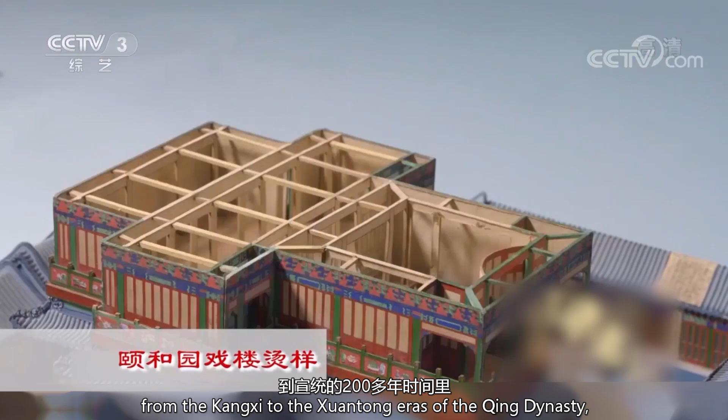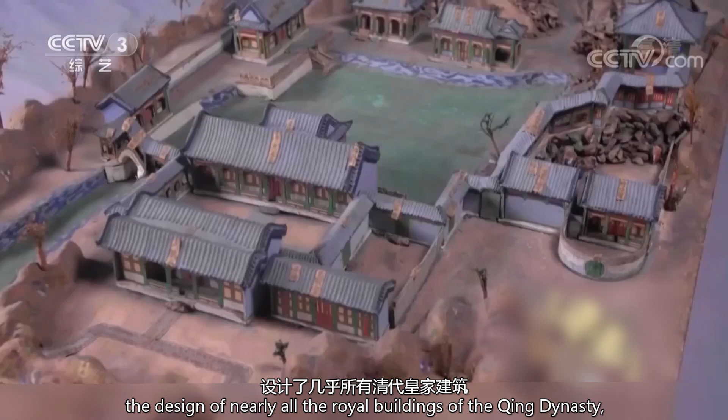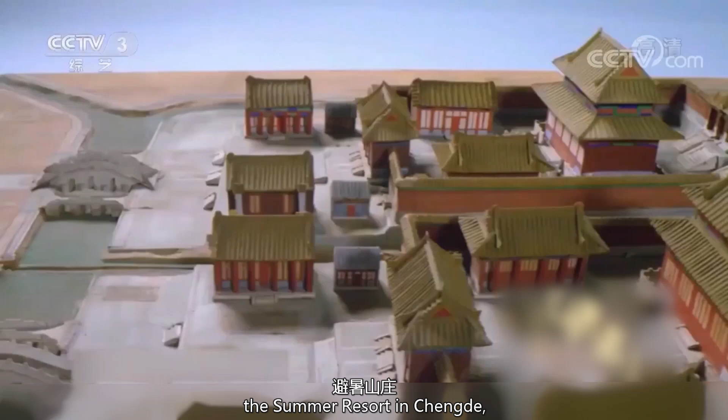Over the span of more than 200 years, from the Kangxi to the Xuantong eras of the Qing dynasty, a Lei family spanning 8 generations led or participated in the design of nearly all the royal buildings of the Qing dynasty, including the Yuanmingyuan, the Summer Palace, the Temple of Heaven, Zhongnanhai, Beihai, the Summer Resort in Chengde, the eastern and western tombs of the Qing dynasty, and so on. Currently, 1/5 of China's World Cultural Heritage Sites bear the mark of the Yangshi Lei family.

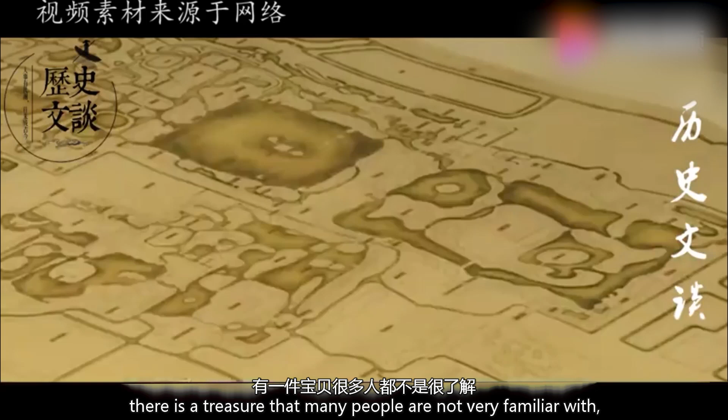Among the national treasures housed in the Forbidden City, there is a treasure that many people are not very familiar with, but its significance is immense. 1/5 of China's World Cultural Heritage Sites are associated with this treasure, which is known as the Yangshi Lei Architectural Drawings and Archives. The Yangshi Lei family is the most impressive general contractor in Chinese history. So, how impressive is the Yangshi Lei family exactly?

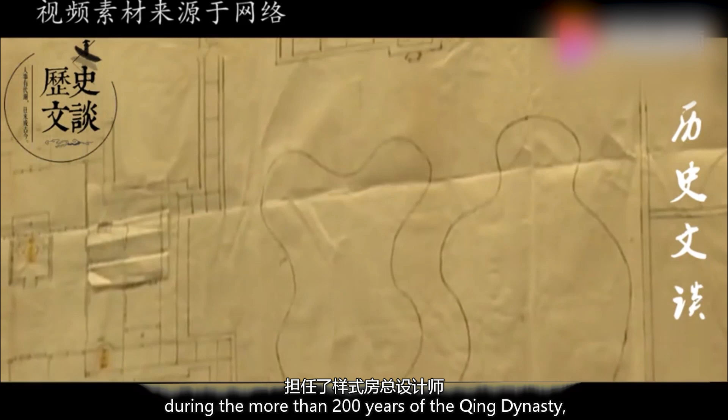The so-called Yangshi Lei refers to the 8 generations of the Lei family, who served as chief designers of the Yangshi Fang during the more than 200 years of the Qing dynasty, and designed and constructed a series of royal buildings such as temples, gardens, tombs, and palaces.

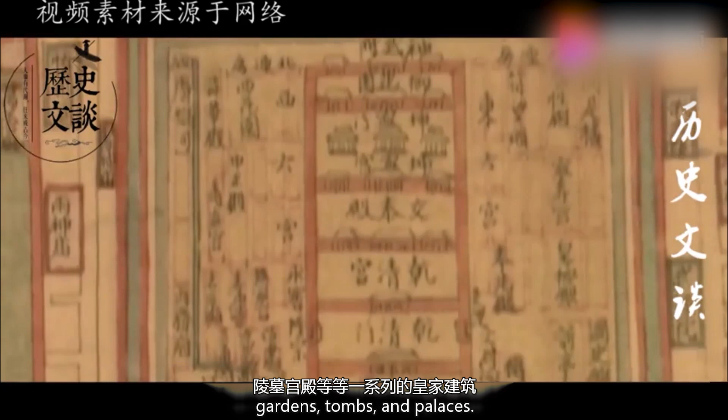In the late 17th century, a southern craftsman, Lei Fada, came to Beijing to work on the palace. Because of his skill, he was soon promoted to design. For 8 generations since him, until the end of the Qing dynasty, the main royal buildings, like the palace, the imperial mausoleum, the Old Summer Palace, the Summer Palace, were all in Lei's charge. This hereditary family of architects is called Yangshi Lei.

In traditional concepts, including the Forbidden City, the beauty of the shape and the ingenuity of the structure of ancient Chinese architecture are purely attributed to the rich experience of craftsmen, and it is not believed that craftsmen also have the ability to organize and express words and images. The large number of Tang samples left by the Yangshi Lei family provides rich drawings and Tang samples from design to construction, correcting the traditional view on the craftsmen of ancient architectures in the Forbidden City.

This explains that ancient Chinese architectural craftsmen not only possessed excellent construction skills, but also possessed the ability to design and express drawings and 3-dimensional models. Therefore, the significance of engaging in drawing drafting is great. We must strengthen our study, improve our self-cultivation, make better design drawings, and serve the people.

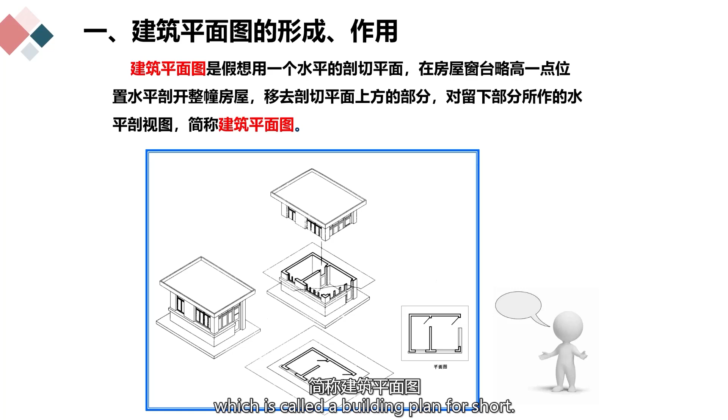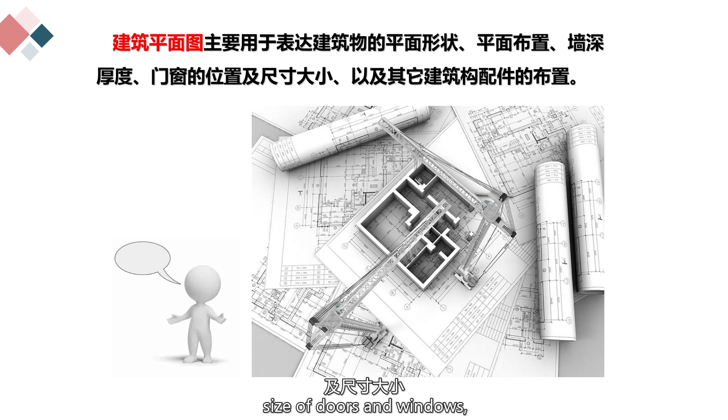First, a building plan is an imaginary horizontal section plane that cuts through the entire house at a slightly higher level than the windowsill. By removing the part above the section plane, a horizontal section view of the remaining part is made, which is called a building plan for short. Second, the main purpose of the building plan is to express the plane shape, layout, wall thickness, position and size of doors and windows, and the arrangement of other building components of the building.

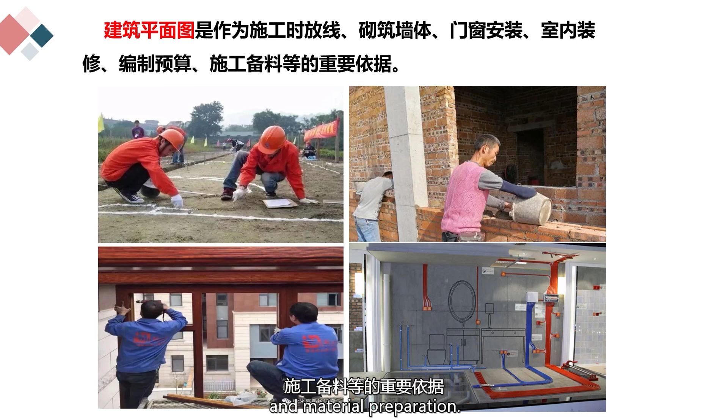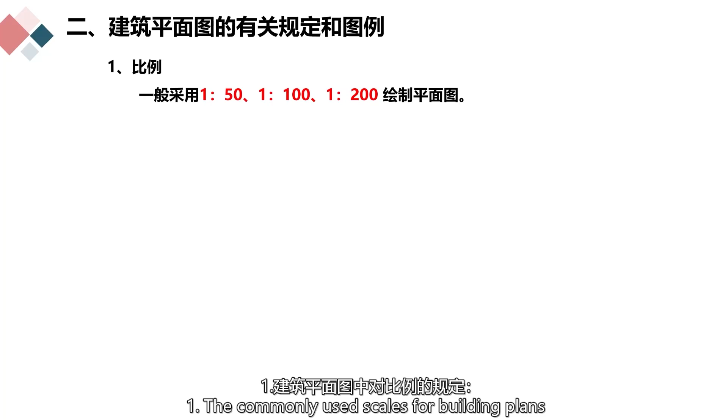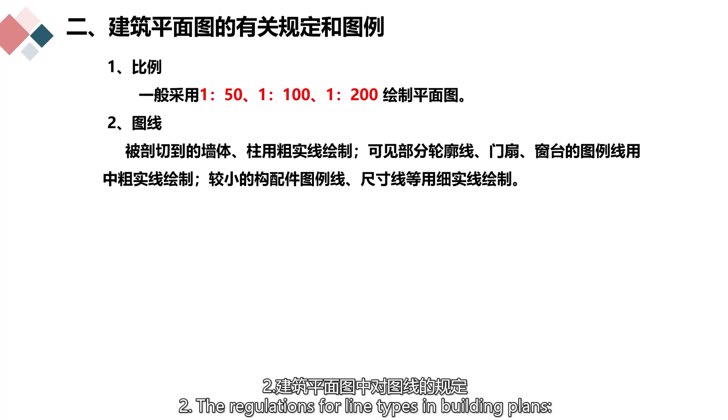Third, the building plan serves as an important reference for layout, wall construction, door and window installation, interior decoration, budget preparation, and material preparation. Now, let's learn about the relevant regulations and symbols in building plans. First, the commonly used scales for building plans are 1 to 50, 1 to 100, and 1 to 200. Second, the regulations for line types in building plans. Walls and columns that are cut through are drawn with thick solid lines.

The outline lines of visible parts, door leaves and window sills, are drawn with medium thick solid lines. Smaller component symbol lines, dimension lines, etc., are drawn with thin solid lines.

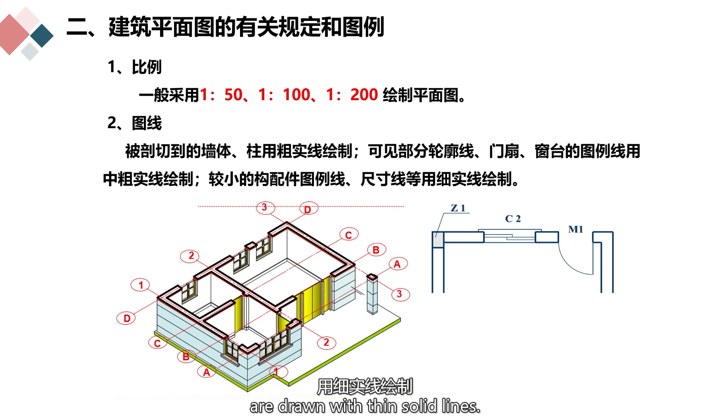Third, regulations on dimension marking in building plans. In building plans, dimension marking includes external dimensions, internal dimensions, elevation, and slope. 1. External dimensions. Generally, 3 parallel dimensions are marked at the bottom and left side of the figure. The first dimension, overall dimension, total length, total width. It represents the overall dimension of the outer contour. That is, the total length and total width from one outer wall side to the other outer wall side.

The second dimension, dimensions between locating axes, bay width, depth. That is, the dimensions between locating axes, which are used to indicate the position of load-bearing members, and the bay width and depth of rooms. The third dimension, detailed dimensions such as door and window openings, mark the width and position of door and window openings on the outer wall, the size and position of wall columns, etc.

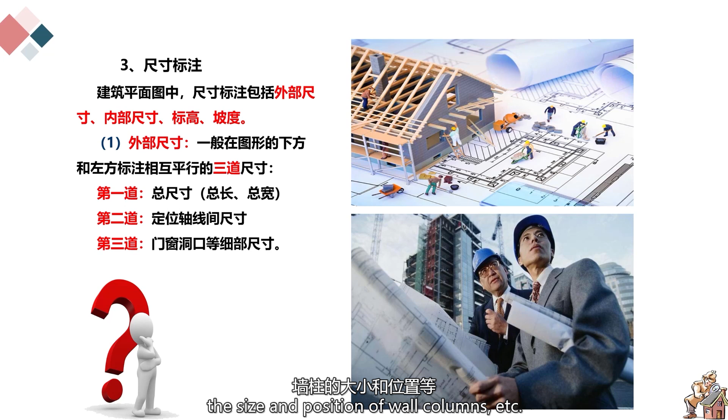2. Internal dimensions, the net dimensions of rooms, the indoor door and window openings, holes, wall thickness, and the size and position of equipment. 3. Elevation. Use relative elevation to mark the elevation of the ground and the elevation at places where the height changes. 4. Slope. If there is a slope, its slope should be marked.

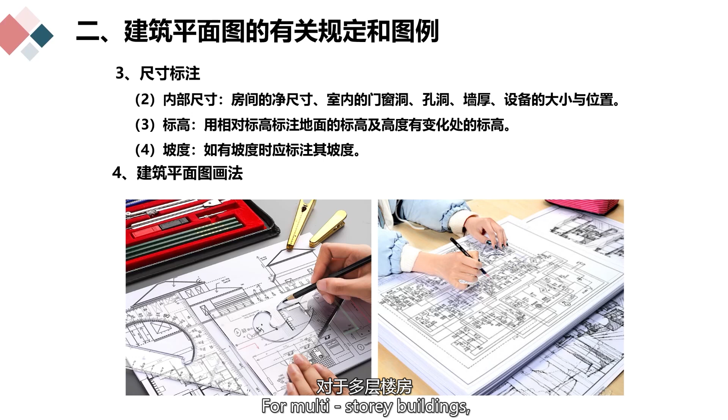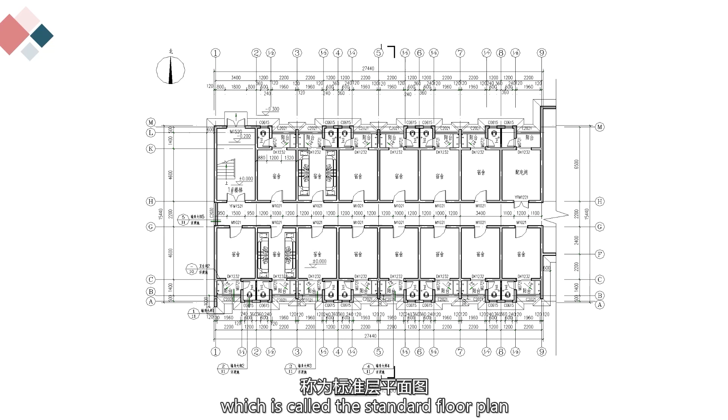Fourth, rules for drawing building plans. For multi-story buildings, in principle, a plan should be drawn for each floor, and the name of the plan should be noted below the plan, such as the ground floor plan, the second floor plan, etc. If the number, size, and layout of rooms on all floors above and below are the same, then the same floors can be represented by only one floor plan, which is called the standard floor plan, or certain floor to certain floor plan. If the building is symmetrical, its symmetry can be utilized to draw half of the floor plans of different floors on both sides of the symmetry symbol.

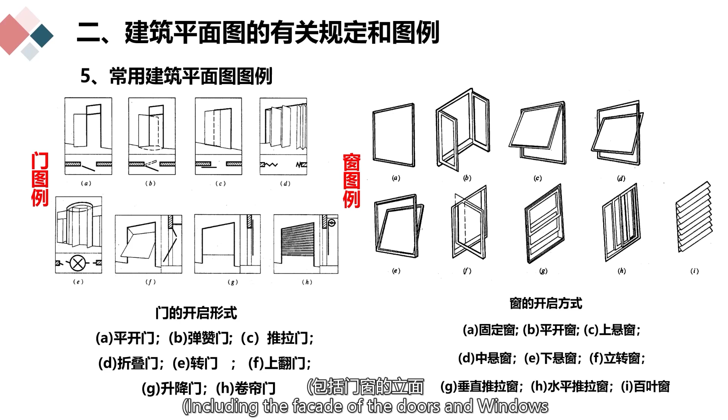Fifth, commonly used legends in architectural plans. As stipulated in the national standard, all kinds of commonly used windows and doors legend, as shown in the figure, including the facade of the doors and windows, and profile examples. Diagonal lines on the window facade legend, and the arcs on the plan, indicate the direction of door and window fan switch, and generally do not need to be represented on the design drawing. The name of the door is denoted by M. The name code of the window is represented by C.

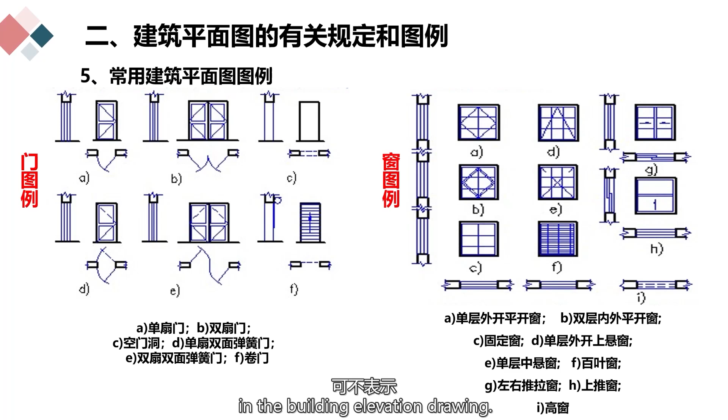In the elevation drawing, the solid line of the opening direction line represents outward opening, and the dashed line represents inward opening. One side of the intersection angle of the opening direction line is the side where the hinge is installed. The opening direction line may not be shown in the building elevation drawing.

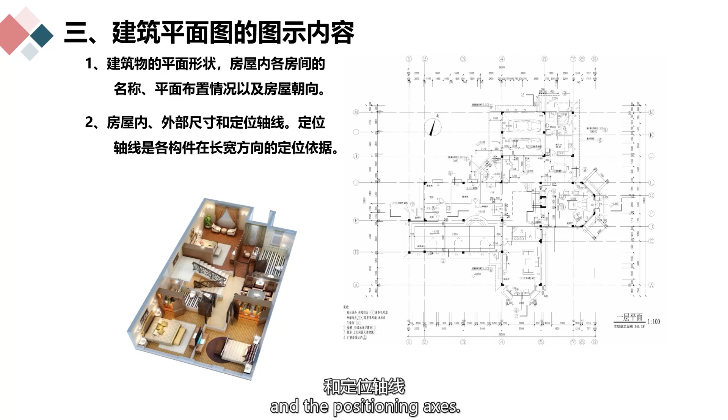Third, the graphic content of the building plan. First, express the plane shape of the building, the names of each room in the house, the plane layout situation, and the orientation of the house. Second, express the internal and external dimensions of the building and the positioning axes. The positioning axes are the basis for positioning various components in the length and width directions. Third, express the codes and numbers of doors and windows, and the opening directions of doors.

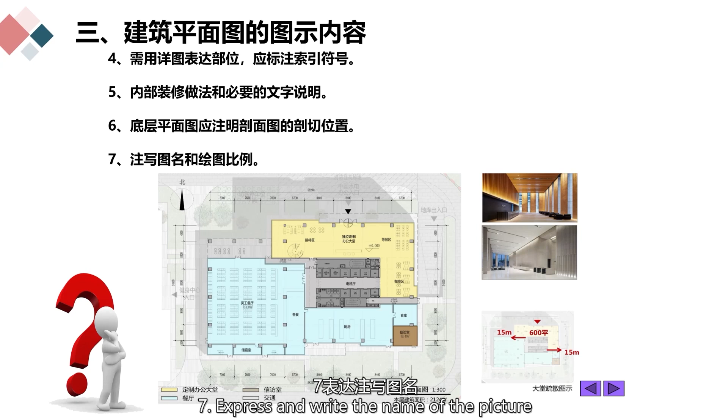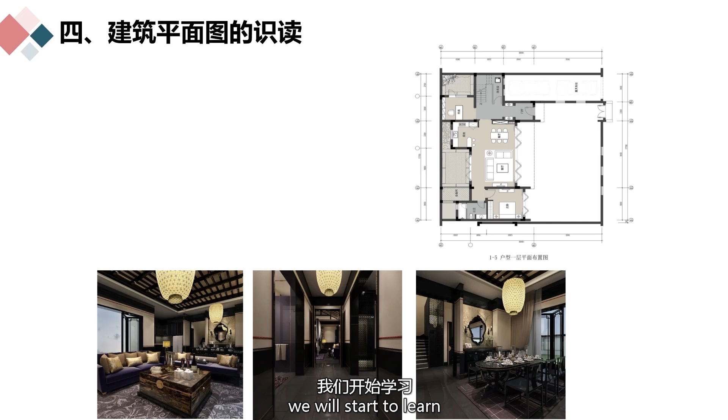Fourth, for the parts that need to be expressed in detail drawings, the index symbol should be marked. Fifth, express interior decoration practices and the necessary text description. Sixth, the cutting position of the sectional view should be noted in the ground floor plan. Seventh, express and write the name of the picture and drawing scale. After learning the basic knowledge of building plans, we will start to learn how to read building plans.

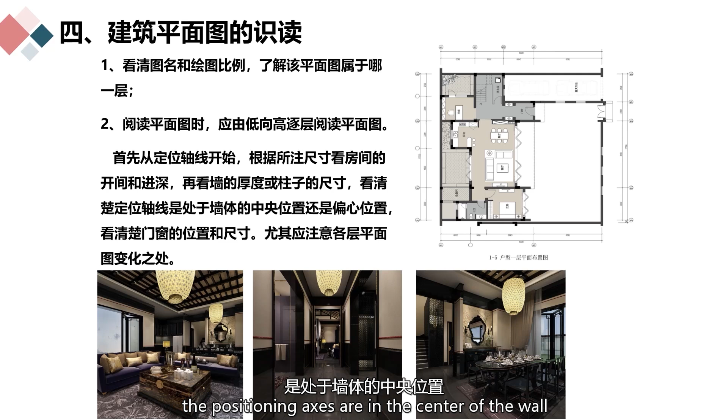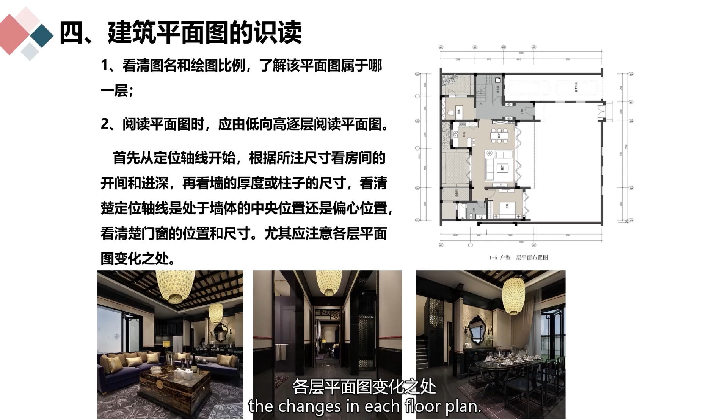Fourth, reading building plans. First, understand the name of the drawing and the drawing scale to know which floor the floor plan belongs to. Second, when reading the floor plan, you should read the floor plans layer by layer, from the bottom to the top. First, start from the positioning axis, and according to the marked dimensions, look at the bay width and depth of the rooms. Then look at the thickness of the walls, or the size of the columns, and make sure to understand whether the positioning axes are in the center of the wall, or in an eccentric position. Also, look at the position and size of doors and windows. Special attention should be paid to the changes in each floor plan.

Third, in the floor plan, on the section surface of the brick wall, according to the regulations, the brick wall material legend should be drawn. If the drawing scale is less than or equal to 1:50, the brick wall material legend will not be drawn.

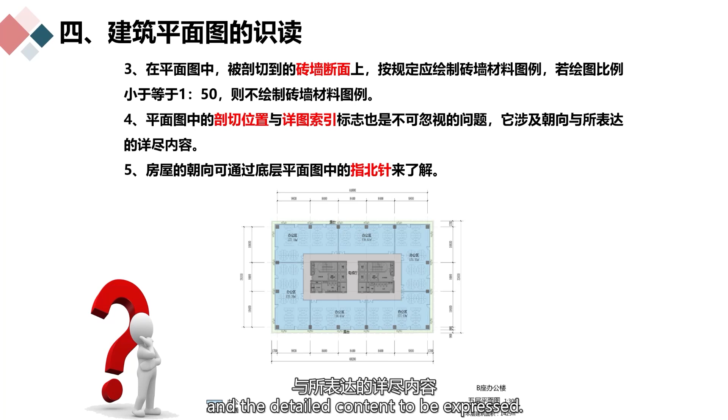Fourth, the cutting position in the floor plan and the detail index mark are also issues that cannot be ignored, as they are related to the orientation and the detailed content to be expressed. Fifth, the orientation of the building can be known through the compass in the ground floor plan.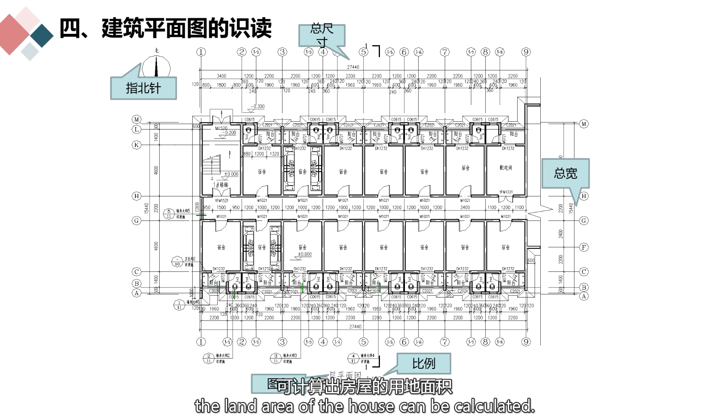Third, from the shape of the floor plan and the overall length and width dimensions, the land area of the house can be calculated. Fourth, from the position of the walls in the drawing and their division, and the names of the rooms, the configuration of the rooms inside the house, their uses, quantity, and their interconnections can be understood.

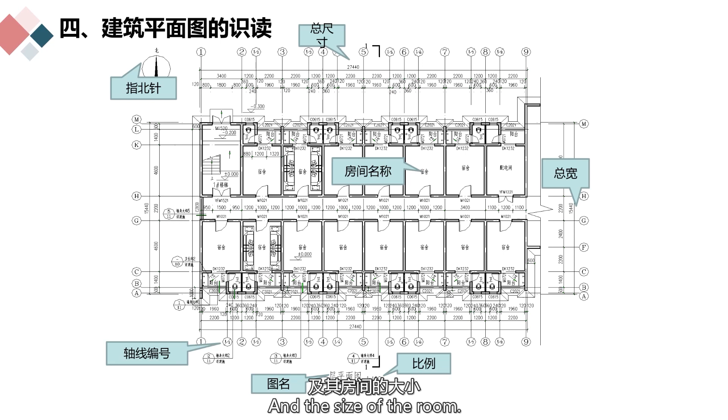From the number and spacing of positioning axes in the drawing, the position of each bearing member and the size of rooms can be understood. The transverse axes of this example are 1 to 9. Vertical axes are A to M.

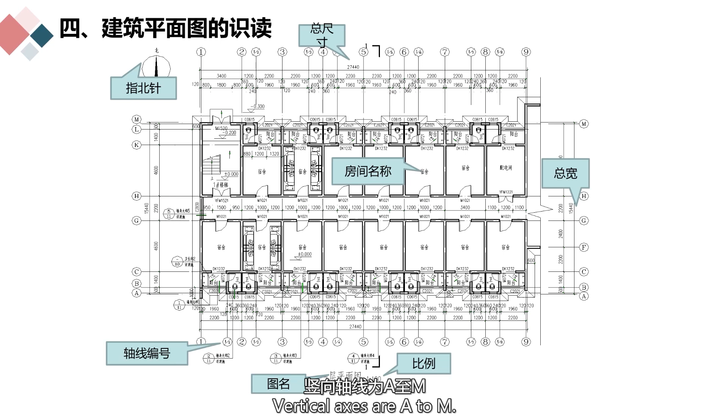Sixth, external and internal dimensions are marked in the drawing, from which the bay width, depth, size and position of exterior walls, doors, windows, and indoor facilities in each room can be known. External dimensions are generally noted with 3 sets of dimensions outside the floor plan. The first set of dimensions represents the overall dimensions of the outer contour.

That is, the total length and width from the outer wall edge at one end to the outer wall edge at the other end. In this example, the total length is 27.44 meters, and the total width is 15.44 meters. The second set of dimensions represents the distance between the positioning axes, which is used to indicate the room's bay width and depth. In this example, the bay width of the dormitory is 3.4 meters, and the depth of the room is 6.5 meters.

The third dimension represents the location and size of each detail, such as the width and location of door and window openings, the size and location of the wall pillars. When dimensioning, this one should be linked to the positioning axis, such as room window C2021. The width is 1.96 meters. The distance from the window edge to the axis is 0.12 meter.

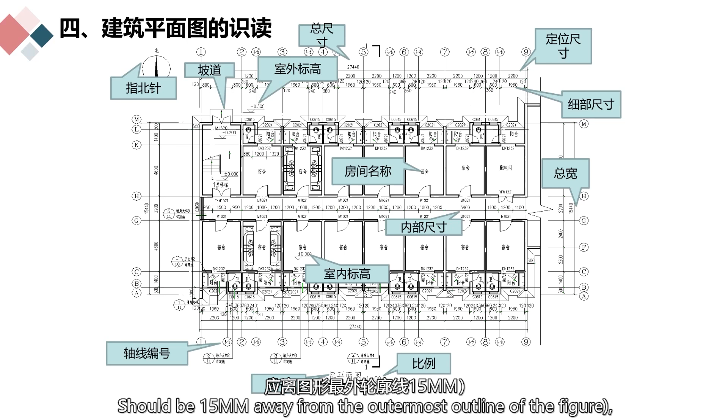There should be an appropriate distance between the 3 dimension lines, generally 10 millimeters. The third dimension line should be 15 millimeters away from the outermost outline of the figure. In case of front, back, and left-right asymmetry of the house, 3 dimensions should be written on all sides of the plan. In addition, the dimensions of details such as steps or ramps, flower beds and apron can be marked separately.

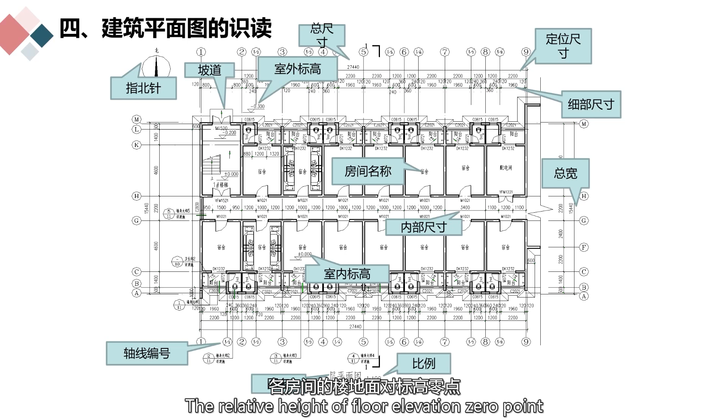The internal dimensions indicate the net space, size of the room, as well as the size and position of indoor door and window openings, holes, wall thickness and fixed equipment, such as toilets, washrooms, etc., and the height of the indoor floor. The floor elevation represents the relative height from the elevation 0 point, noted as plus minus 0.000, of each room. In this example, the ground floor is designated as the elevation 0 point, which is equivalent to the absolute elevation of the indoor ground level 19.65 in the general layout plan.

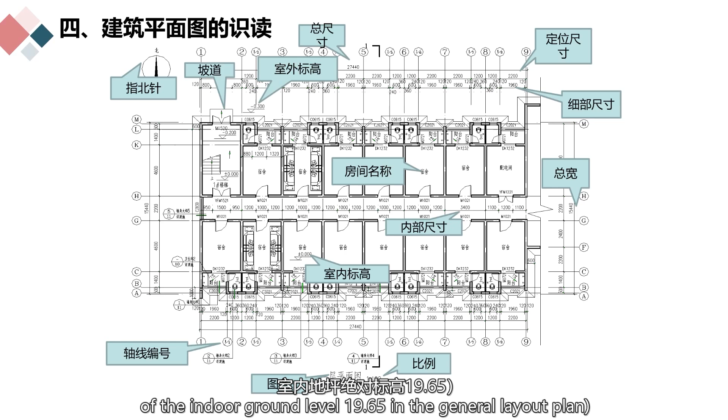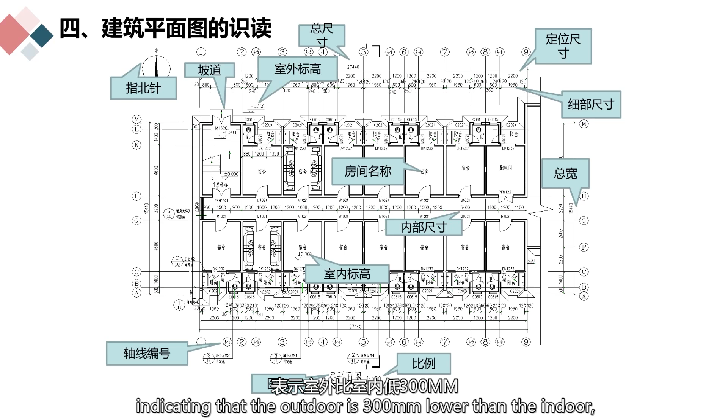The outdoor ground elevation is minus 0.3, indicating that the outdoor is 300 millimeters lower than the indoor, preventing rainwater from backing up. The dimensions of other floor plans, in addition to marking the dimensions between axes and the total dimensions, can omit the same dimensions as the ground floor. Seventh, a number 1 double flight staircase is arranged at the upper left in this drawing. 8th, mark the index symbols of wall details and write text descriptions, etc. 9th, in the ground floor plan, the cutting symbols of the sectional view should also be drawn.

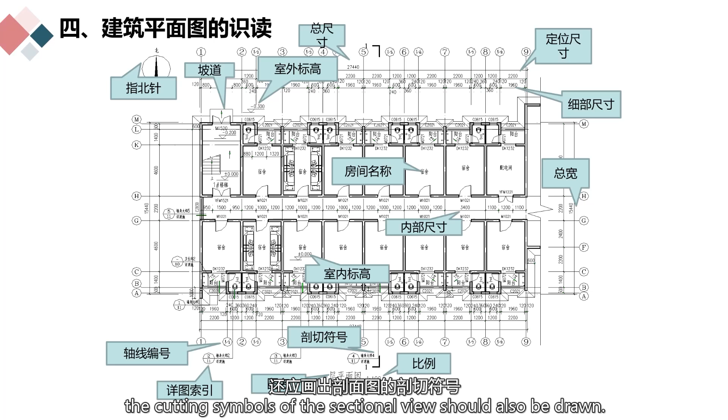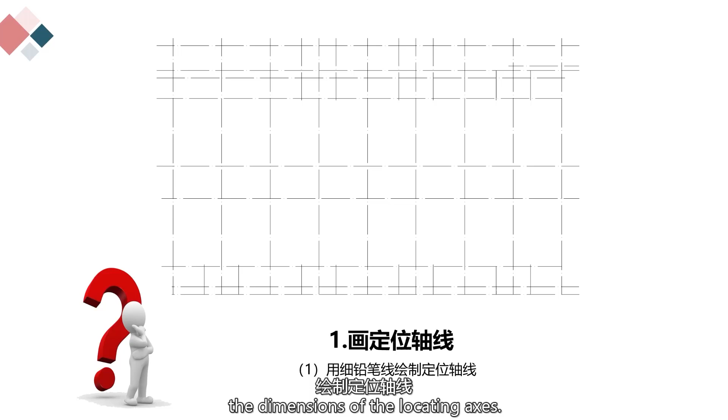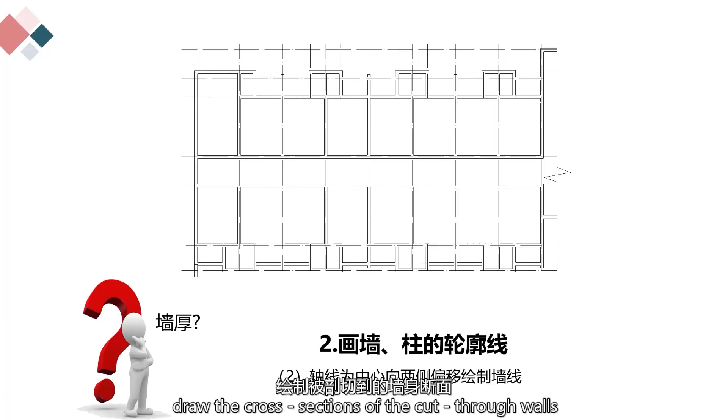5th, drawing of architectural plans. First, draw the locating axes according to the dimensions of the locating axes. Second, according to the thickness dimensions of the walls and the detailed dimensions of the doors and windows, draw the cross sections of the cut-through walls and the outline of the columns. Third, draw the door and window symbols in the floor plan, as well as other building component symbols and various indoor facility symbols, etc.

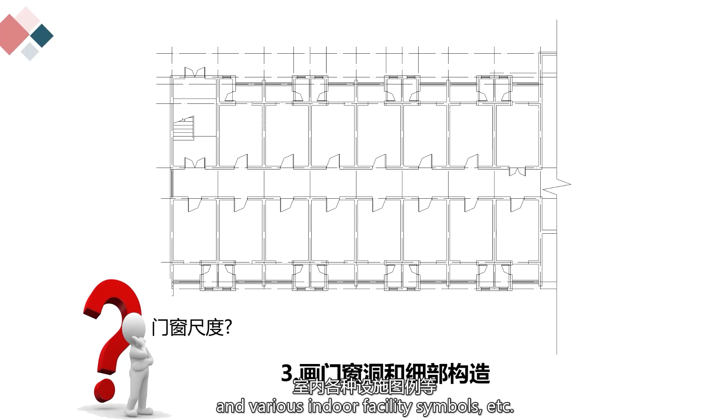Fourth, after inspection without error, thicken the drawing lines according to the specified line types and widths. Mark the positioning axes and dimension markings. Mark the detail index symbols, the compass, and the text descriptions. That's all for this section.